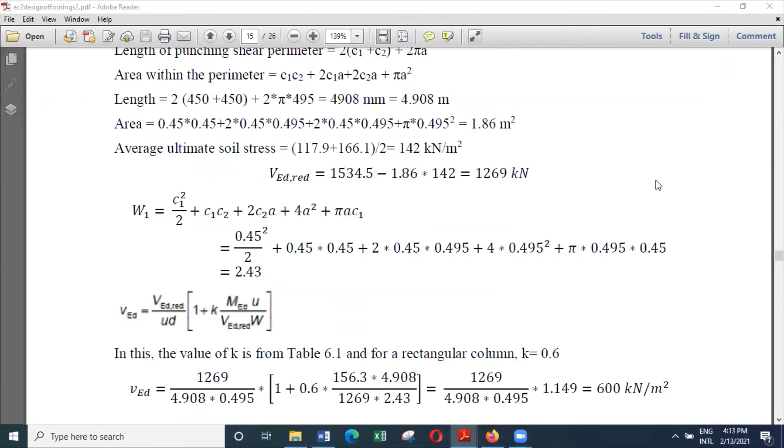So we look at the combined footing. When you have two footings close by, sometimes we can go with combined footing. So again, when two columns are located close to each other, sometimes it's convenient to combine the footings to form a continuous base.

The projections outside the column boundaries are selected so that the resultant load passes through the centroid of the base area when all loads are acting under service conditions. The idea is this is expected to give a uniform pressure under the base. And then we consider the same uniform pressure might remain under the ultimate conditions as well.

So basically we'll have a quick look at one example. Design a combined footing to support two columns located 3 meters apart. So the distance between two columns is 3 meters. The allowable bearing pressure is 200 kilonewtons per meter squared. And concrete strength is 25 megapascal and steel strength is 500 megapascal.

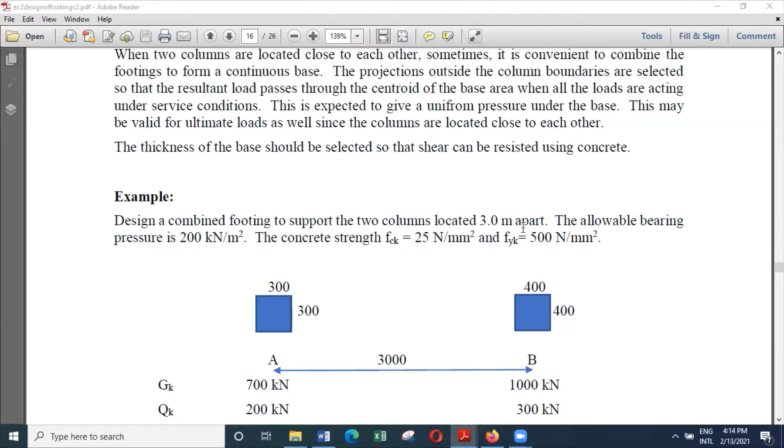And the size of the columns are 300 by 300 and 400 by 400. This column carries a lesser load, 700 and 200. And this carries a permanent of 1000 and variable of 300. So basically we have to select a suitable size for the base.

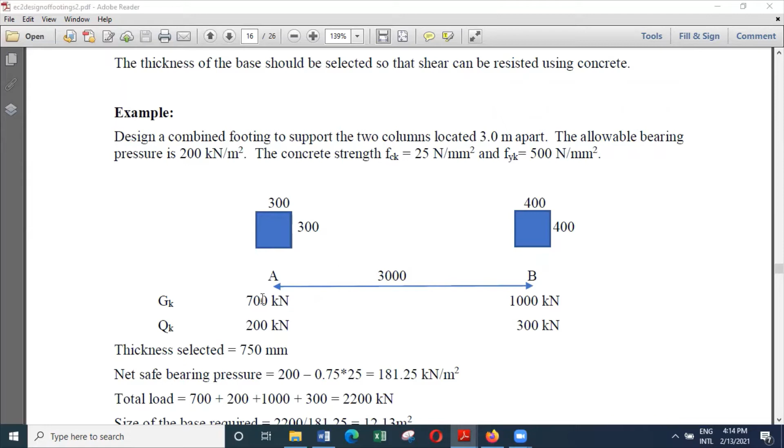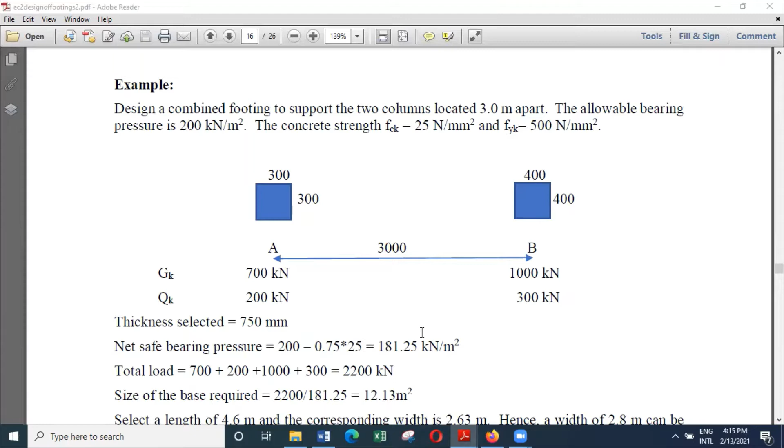So to select the size of the base, we'll simply add all these loads. And in addition to that, we'll also calculate the net bearing pressure. I told you earlier that either we can calculate and add the weight of the base, or we can calculate the net bearing pressure, that is 200 minus the thickness of the base multiplied by the density will give us the net bearing pressure that can be applied, which is 181.25.

So the total load is about 2200. From that, you can see that we need a base of around 12.13 square meters.

And this distance is 3 meters. So we can select a reasonable length for the base. I have selected a base length of 4.6 meters. And for a 4.6 meter length, once you divide 12.13 by 4.6, you will get a width of 2.63. So I'll select a width of 2.8 meters, length of 4.6 meters.

But the question is, what is the overhang that I should be getting here? We know the total length, but we don't know what is the projection from the face of the column. To get the projection from the face of the column, we make an assumption.

That assumption is the centroid of these two loads will act somewhere here. And we'll place the base in such a way the resultant of the soil pressure will also act through the same point. The idea is, when you do this, you will end up with no bending moment, because the resultant force is acting through the resistance. If there's no bending moment, then the pressure distribution under the base should be almost uniform.

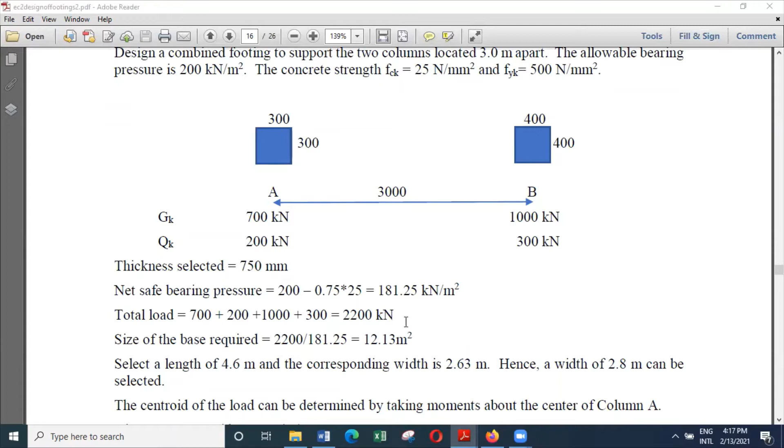So what we do is, first we find what is the distance to the centroid, and then we'll bring the centroid of the base to the same location. So what we do is, to find the distance to the centroid, I can take moments about column A, that is 1300 multiplied by 3 divided by the total load of 2200 kilonewtons. So that is 1300 multiplied by 3 divided by 2200 will tell the location of the centroid. So from this centroid, on either side, we should get 2.3 meters.

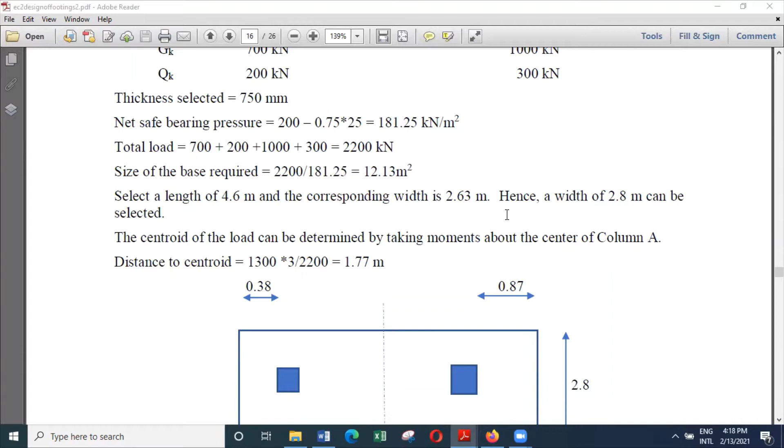2.3 meters on either side. So 2.3 minus 1.77 is 0.53, and the size of the column is 300 by 300 minus 0.15 will give 0.38. And on this side, if it is 1.77 meters from here, it will be 3 minus 1.77 from the other side. That means from this side it is 1.23 meters.

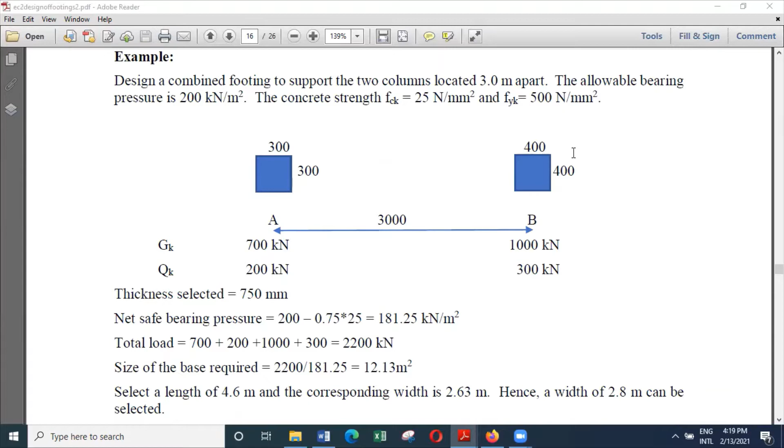We select a length of 4.3 meters, 4.6 meters. So 2.3 minus 1.23 will give us 1.07 minus 0.2, half the size of the column, will give us a projection of 0.87 meters from this side. So we get a projection of 0.87 meters from this side, a projection of only 0.38 meters from this side.

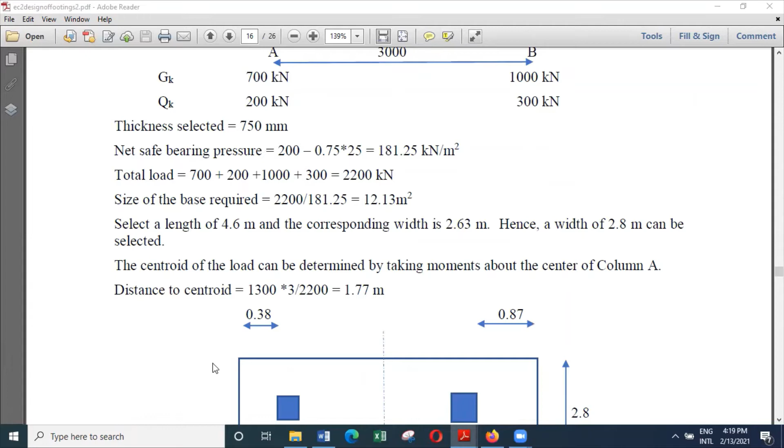Now we know that the resultant force of these will act 1.77 meters away from the center of column A, and the resultant of the soil pressure underneath also acts on the same line. Because of that, there's no moment acting on the base. If the moment is zero, only the axial load is there, and when the axial load is there, we can find the axial stress.

The axial stress will be given by, for design purposes, we have to go with the ultimate. That means 700 multiplied by 1.35, 200 multiplied by 1.5. Here also 1000 multiplied by 1.35, 300 multiplied by 1.5. So you'll end up with a total load, this divided by the area of the footing will give us the maximum pressure acting from below, which is 236 kilonewtons per meter square.

So now the base is balanced. How we balance that is by finding the centroid of the column loads, and then coinciding the centroid of the base with the centroid of the resultant forces. That way we can find the stress, and you know the cover to reinforcement and effective depth.

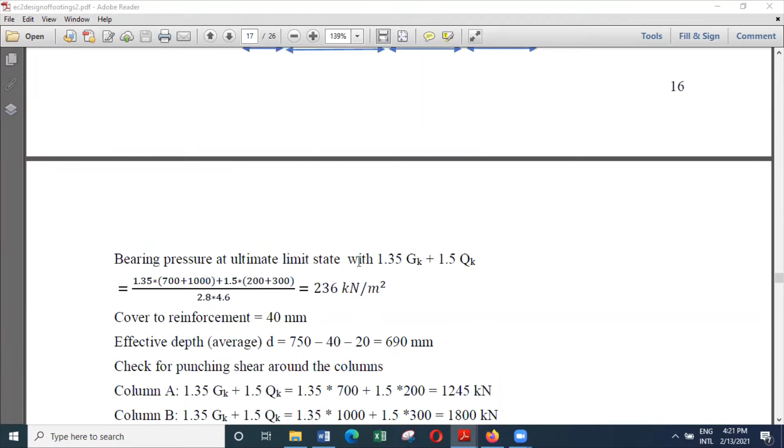I have considered an average value of 690, and we also know the punching shear forces in the individual columns. Then we can first check whether there can be any punching shear failure at the perimeter with the selected depth of 750 millimeters.

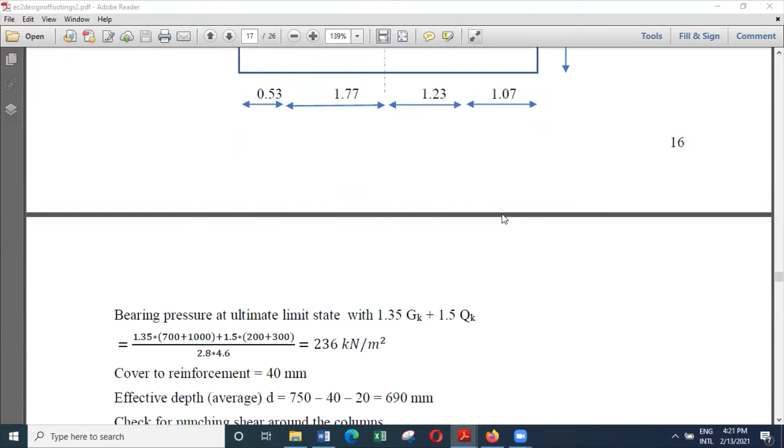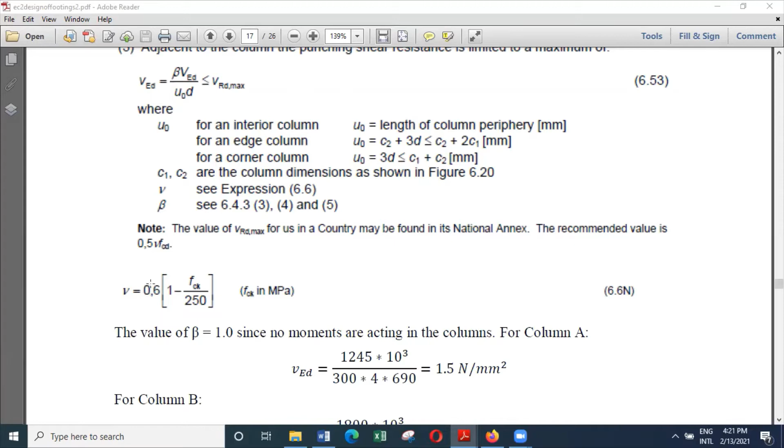For that, we have to calculate the maximum shear strength, which is given by this particular expression, where nu is this, so we can calculate the punching shear resistance. But when calculating that, VEd should be less than VRd,max.

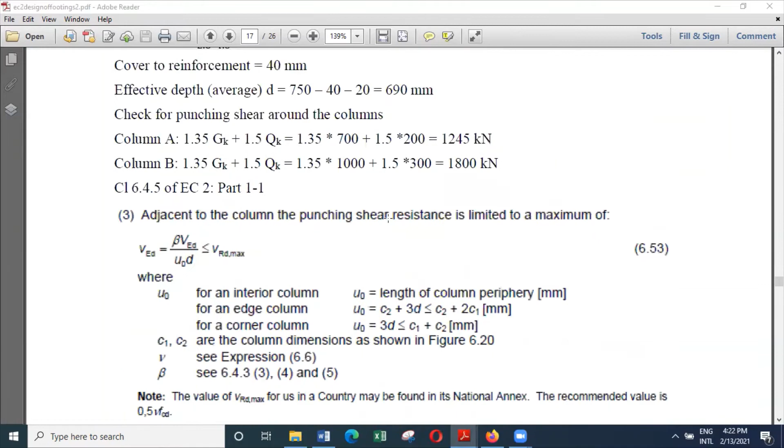So what we can do is we can calculate the value, 1245 kilonewtons divided by 300 into 4 is the perimeter of the column, and effective depth is 690. So we can see VEd is equal to 1.5 newtons per millimeter squared. For column B, 1.63, and VRD max is 4.5.

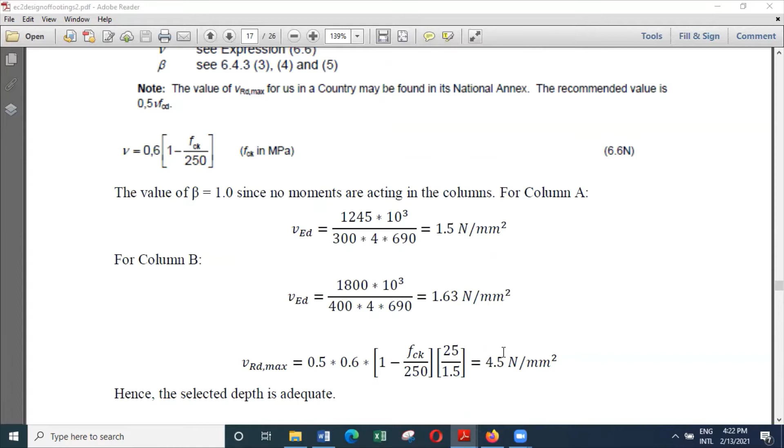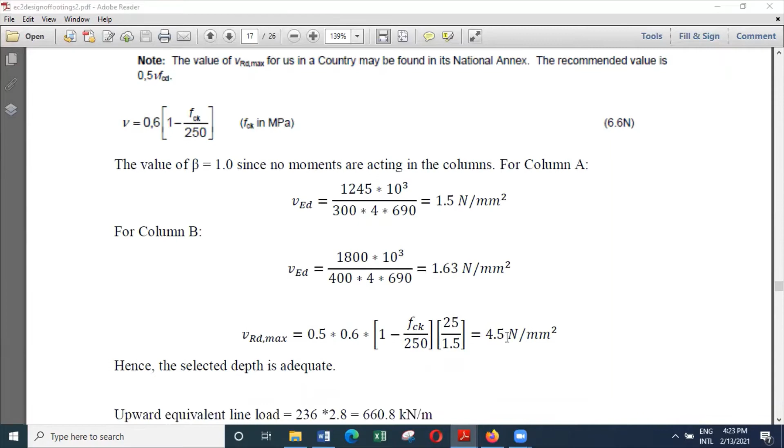Generally we can have an idea: VRD max is about 4.5 to 5 newtons per millimeter squared. Generally the shear strength of concrete is about 0.4 to 0.5 range, it can be more as well, but generally in that range. This indicates that there cannot be any shear failure around the perimeter.

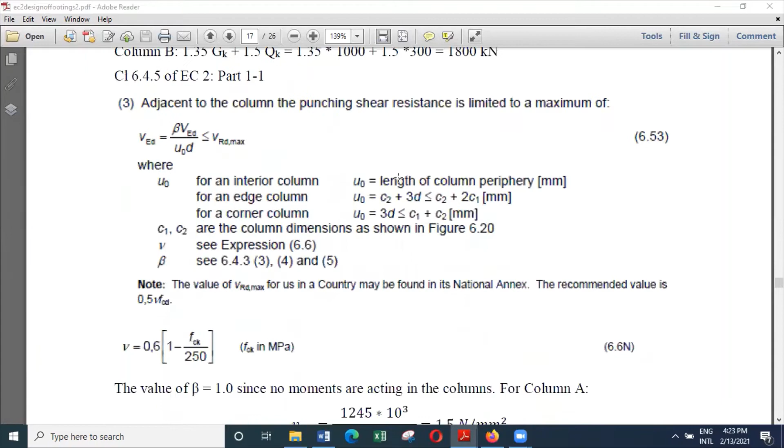Then what we have to do is find the bending moment diagram due to the loads acting on this, because there's a width of 2.8 meters and a pressure of 236. You multiply 236 by 2.8 to find a line load. Equivalent line load is 236 into 2.8, that is 660.8. So the situation is we have a base of 4.6 meters of length and a force of 660.8 acting upwards.

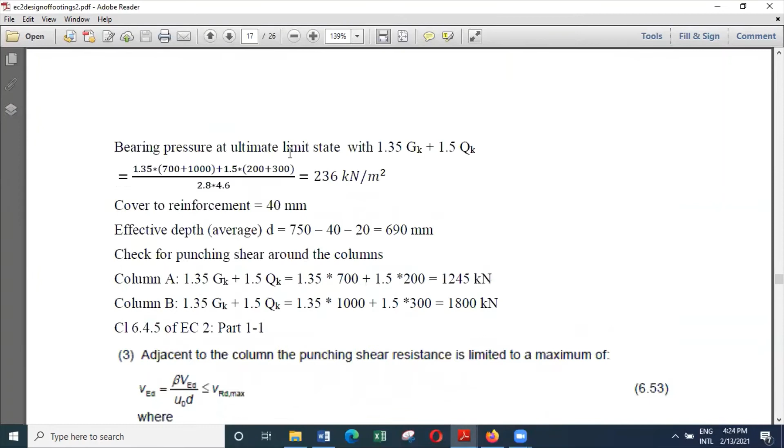So you can find the shear force here. Shear force at the face of the support, the projection is 0.38, so the shear force at the face of the support can be found, and also we can find the shear force at the center of the support. The shear force diagram is drawn with the center of the support: 660.8 multiplied by 0.53 is 350. So this is the shear force at the center of the support.

And at 350, we get a shear force of 1,245 kilonewtons acting downwards. So 350 minus 1,245 will give us 896. Then the shear varies this way, because again 236 is acting upwards, and the distance between these two is 3 meters. So 896 minus 236 into 3 is...

896 minus 236 into 3... sorry, 660.8. 896 minus 660.8 into 3 is minus 1086. So the shear force goes that way.

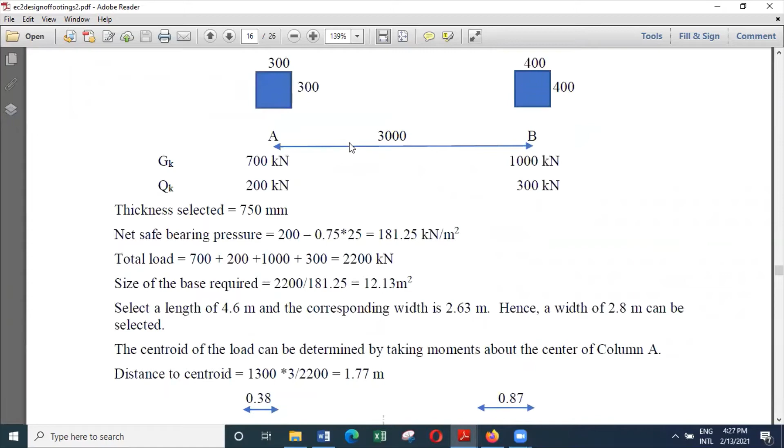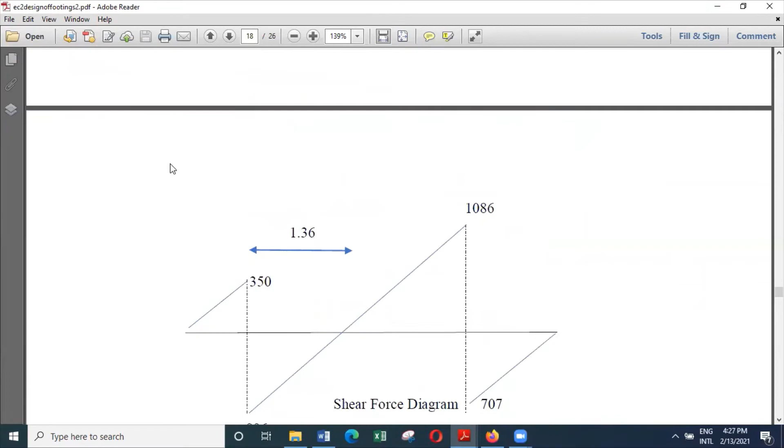So here you get a force of 660.8 acting over a length of 1.36 plus 0.53, which is 1.89, multiplied by 660.8 into 1.89 divided by 2. That is the moment acting upwards,

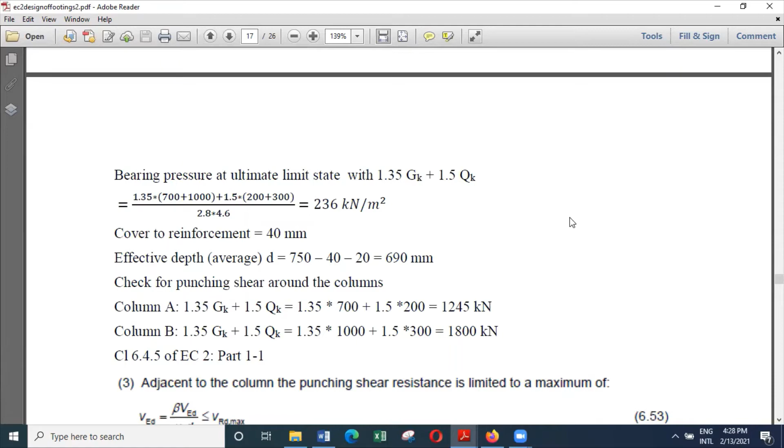minus, you get a load of 1245 multiplied by 1.36, you get a moment of 512. I have got the answer as 644. Let's just have a look at the moment.

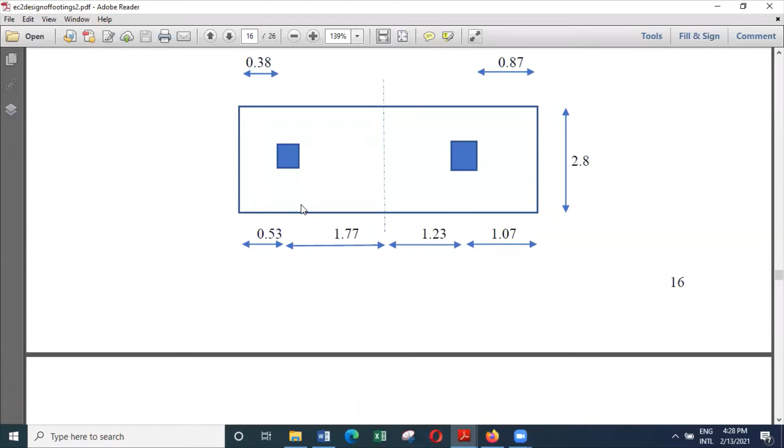The overhang is 0.53 meters, so 660.8 multiplied by 0.53 squared divided by 2 is 92.8. Yeah, that's correct. So the bending moment here will be equal to

660.8 multiplied by 1.89 squared divided by 2, minus 1245 multiplied by 1.36, then minus 513. So this value may be 513, but I have considered it as 644.

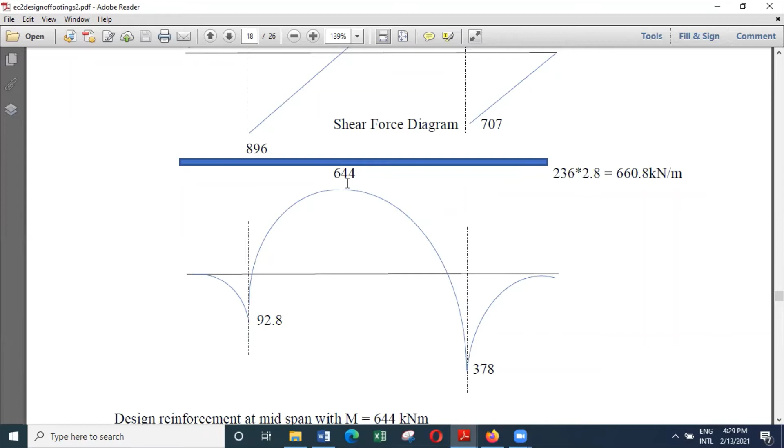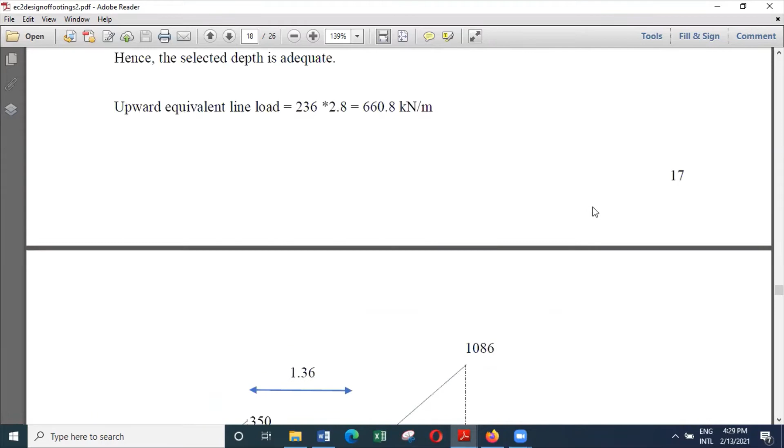Similarly, on this side also you can find the bending moment. The projection is 1.07, so the bending moment here is 660.8 multiplied by 1.07 squared divided by 2.

1.07 square divided by 2... 7 square divided by 2, that is 378. So this is correct. This may be slightly different, but it doesn't matter.

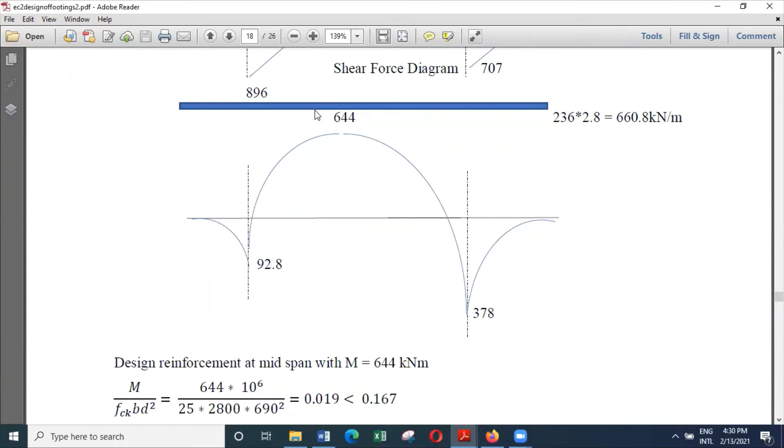So the bending moment, shear forces - you can decide the reinforcement on the basis of this. And when you decide the reinforcement on the basis of this moment, you can see 0.95D governs, can find the reinforcement, and then find the minimum reinforcement, and you can see the minimum reinforcement is governed. Because the minimum reinforcement is governing, when you look at the number of bars, you need 13 bars.

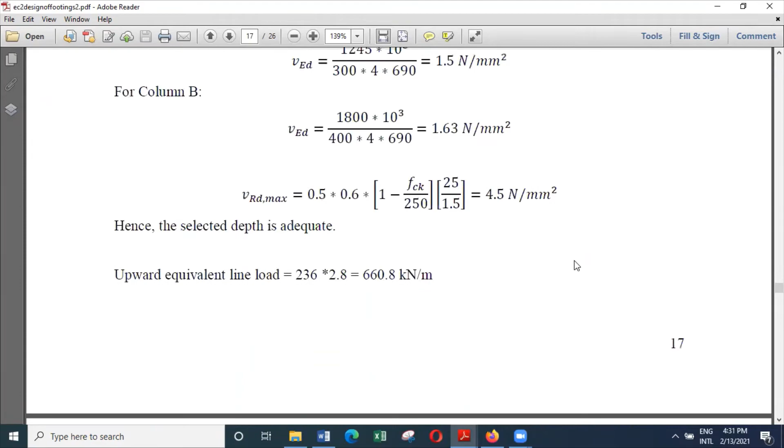So in this combined footing, because the minimum reinforcement is governing, we need 13 number of 16 diameter bars at the top, and also 13 number of 16 diameter bars at the bottom, in this direction. Similarly, there's a projection here, and you can find the bending moment in the shorter span direction also, and then provide the reinforcement in the shorter span direction as well.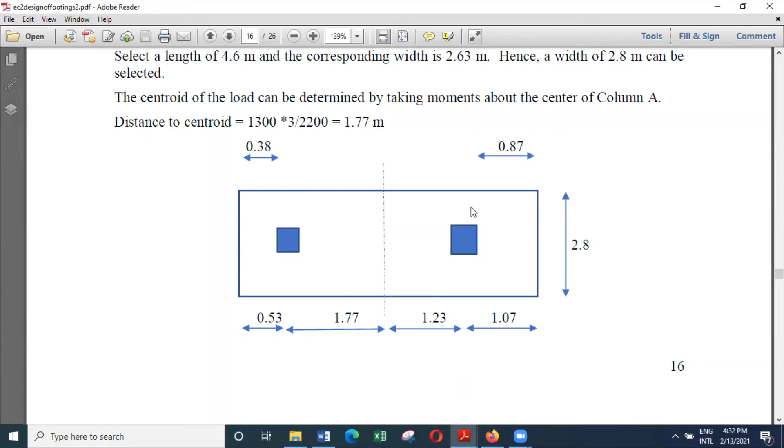In addition to that, you can check for punching shear failure around the most heavily loaded column. And if the punching shear failure does not occur around the most heavily loaded column, then you will say generally the foundation is okay.

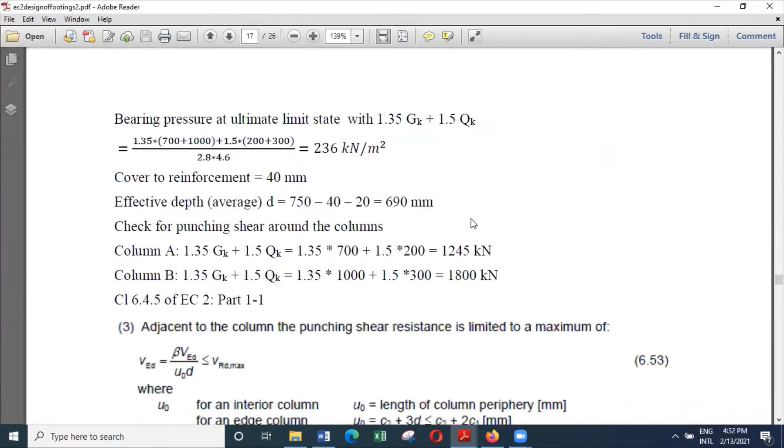So you can see the main reinforcement can be found. In addition to that, you have to check the base for shear failure. Check the base for shear failure.

And you can see when you look at the shear force diagram, there's a maximum value of 1086. So the maximum direct shear might occur somewhere here, and that is D away from the face of the column. So you have to find the shear force D away from the face of the column.

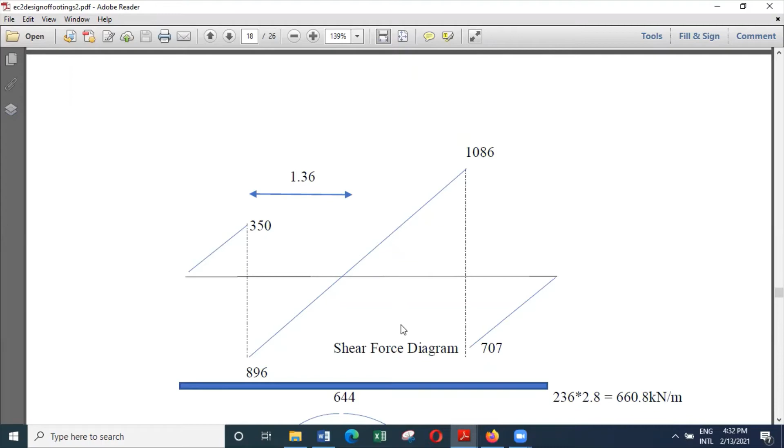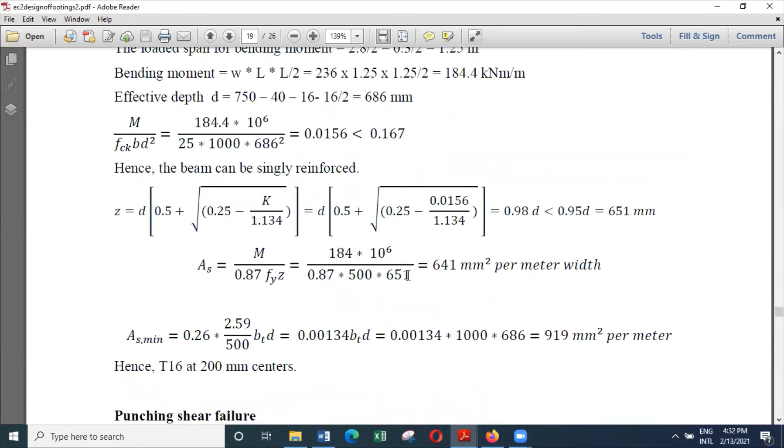And then you have to find the shear failure at the face, shear failure D away from the face of the column, and then check that as well.

So here you can see check for direct shear failure. Direct shear failure is 1086 minus 286 multiplied with 2.8, and 0.69 is the effective depth, plus 0.2 is the size of the column. You can find the direct shear force, and from that you can work out what is the direct shear stress, and you can see it's less than the V minimum value.

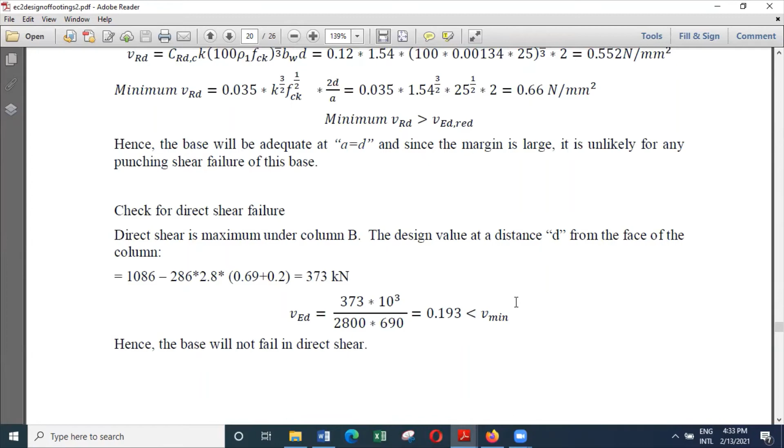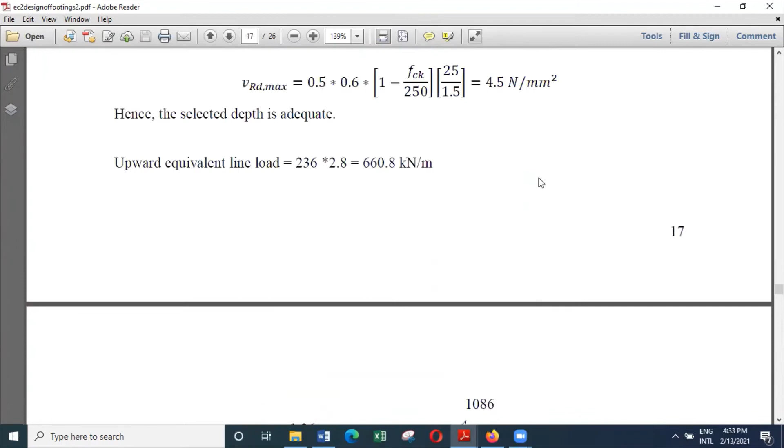And similarly, you can check at a distance D away from the face of the support. Here also I have checked D away from the face of the support. The reason is, here you can see when you look at the size of the column, it's only 2.8 here, and when you consider the projection from here, it is only 1.2 meters. That means the 2D perimeter is outside the base.

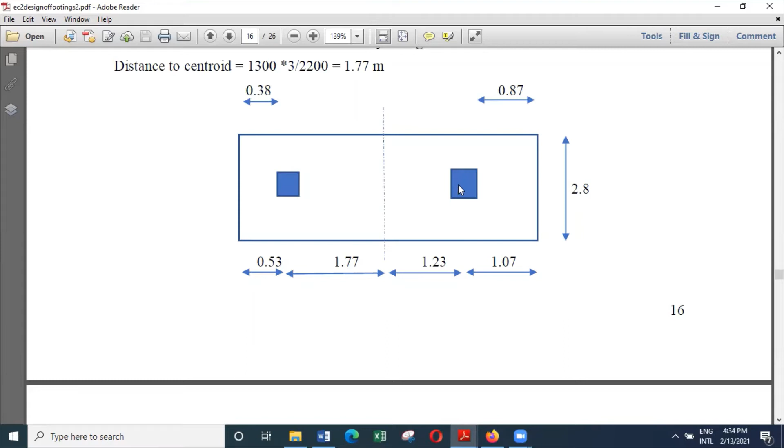So instead of checking at 2D, you can check at 1D and see whether the punching shear failure can occur. But at 1D, you get the enhancement as we discussed earlier. So basically, when it comes to the combined footing, the important thing is to get the dimensions right, so that you will find that the resultant force due to the two columns will coincide with the center of the base.

So because we have repetition of calculations, I did not spend much time looking at the reinforcement calculation and so on. But the only thing I wanted to highlight is the bending moment diagram. I think this value may be 500 something, not 644. We have to just do a calculation and see, and based on that, you can work out the reinforcement.

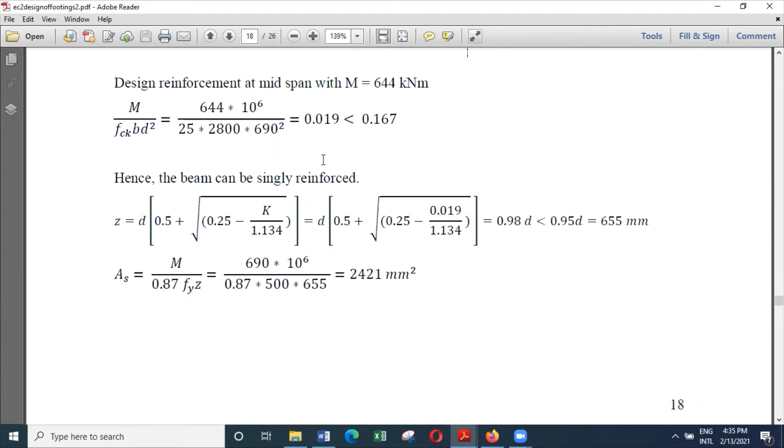And when you work out the reinforcement, you can see the minimum reinforcement is now governing, because the reinforcement requirement here is 2421, whereas the minimum reinforcement requirement is 2588.

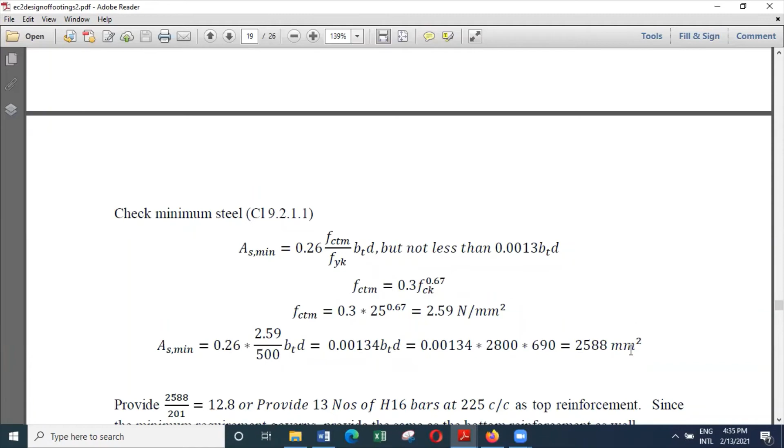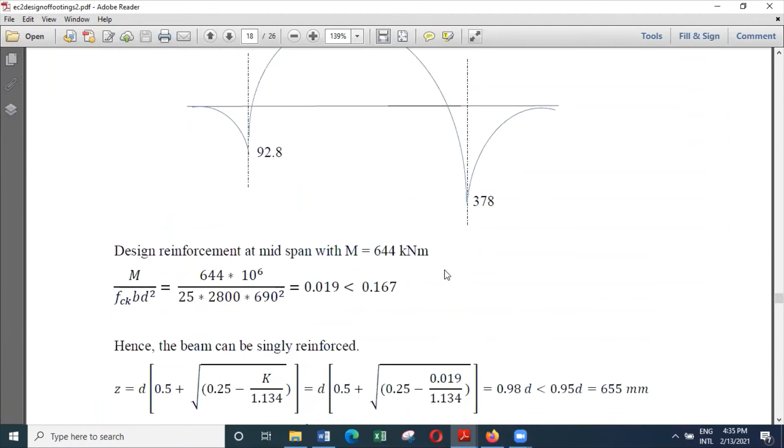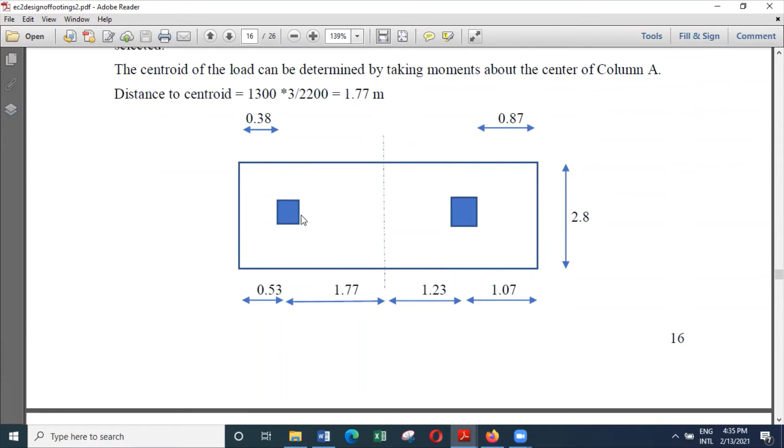So then in the transverse direction also you can check the bending moment, and I have checked the bending moment at the face of the smaller column. On the other hand, because we are having two columns, if you want, you can check the bending moment at the center as well. I have considered the bending moment at the face of the smaller column.

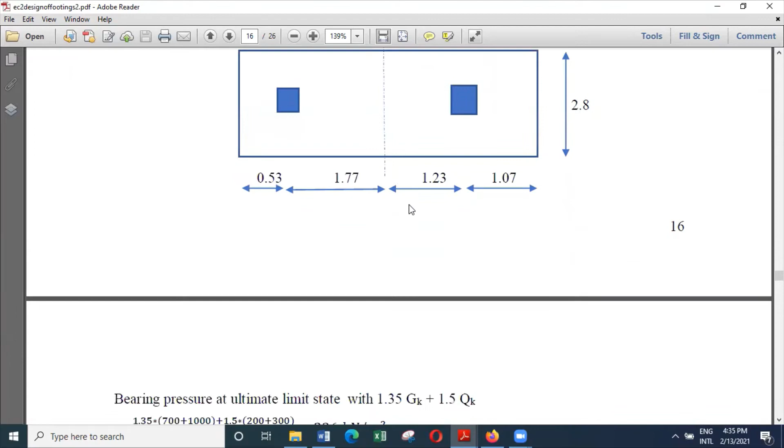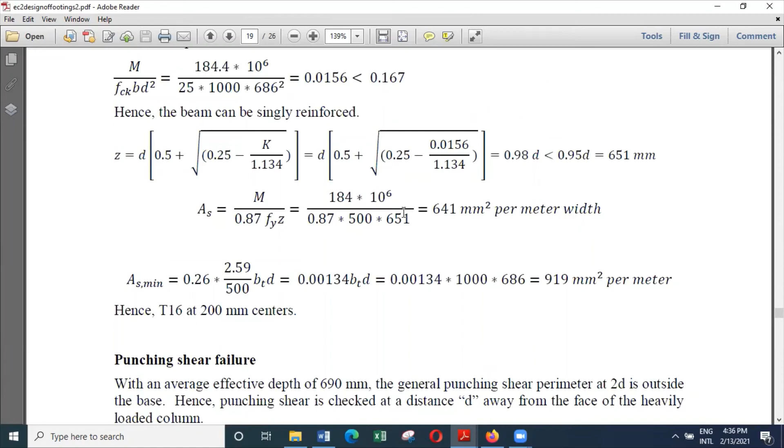You can check the bending moment at the center of the column as well, because we have two columns separated. And then this transverse bending, then you can check for punching shear.

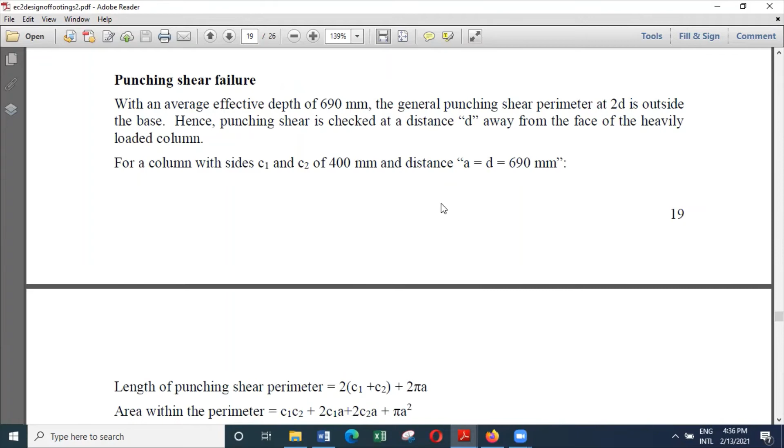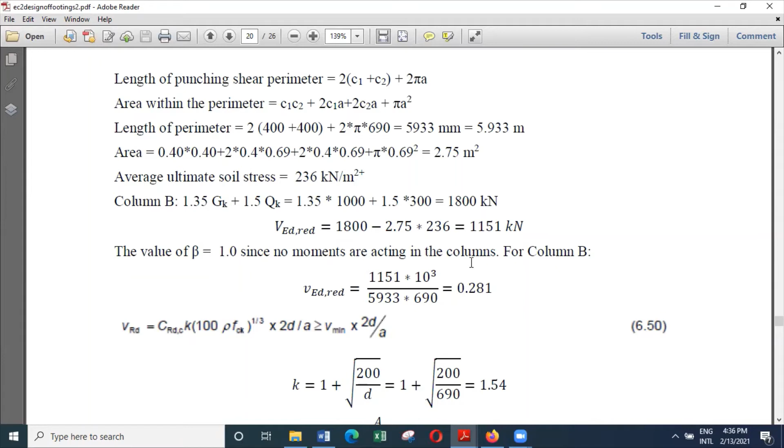And because the punching shear perimeter is almost outside the base, I have checked at D instead of 2D. And when I check at D and consider the V reduced value, the shear is 0.281. So even without enhancement, you can see this value is less than the minimum.

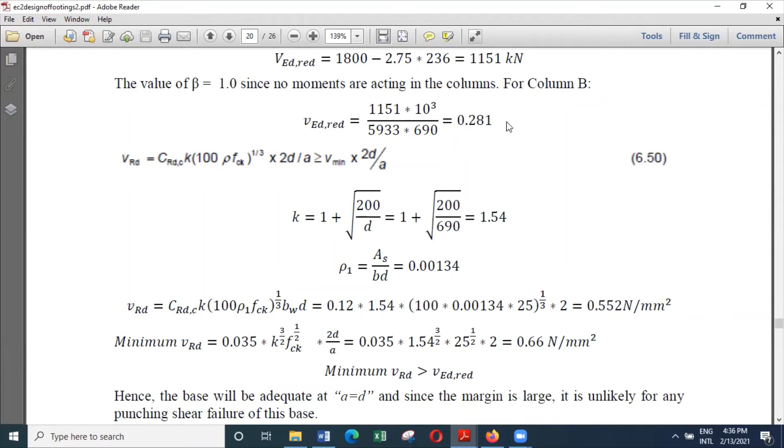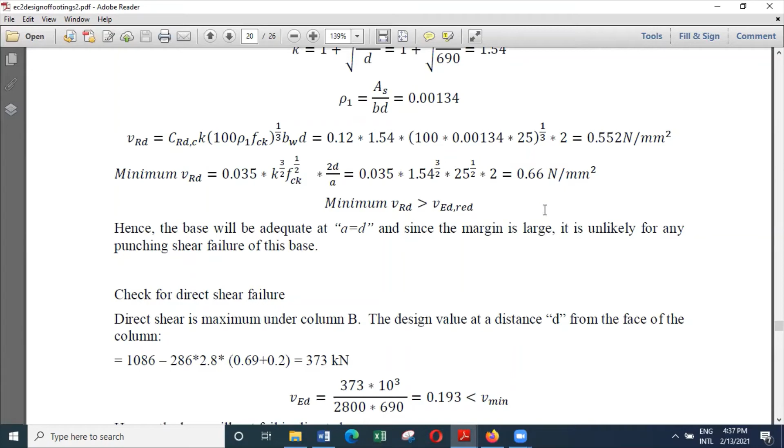So the same calculation repeated, and you can see the shear carrying capacity is 0.66, whereas the punching shear stress is 0.281. So there's no chance for punching shear failure. So basically the thickness selected, 750, looks fairly high, and there's a chance that you might be able to reduce the thickness of the base, because direct shear is also, you can see, very low value.

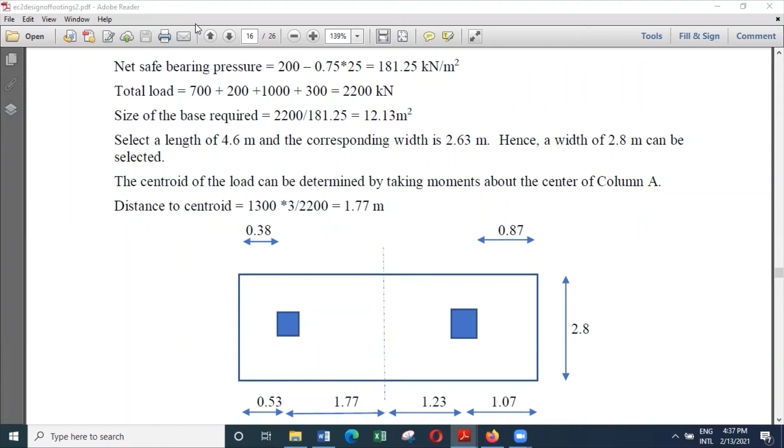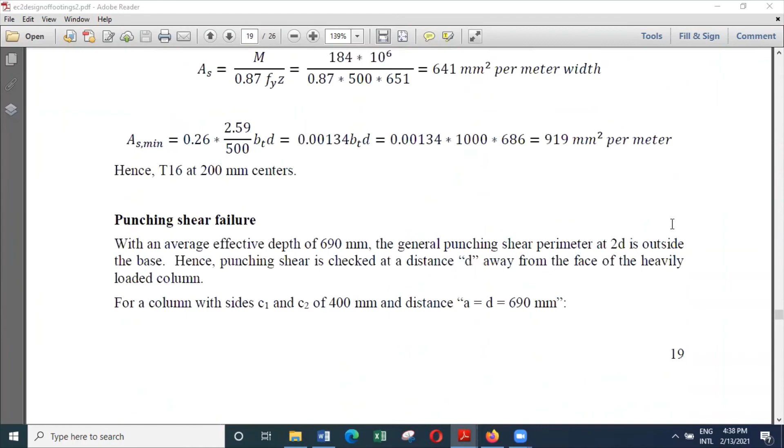Now move to the next, strap footings. So what do you mean by a strap footing?

In combined footing, what happens is we continue the base from one base to the other and we combine that. And we also try to make sure the center of the loads acting in the two columns will coincide with the center of the base.

But sometimes what happens is, we cannot fulfill that condition. In which case, we'll end up with a variable stress distribution under the base. But in such situations, there's another solution, provided the soil is fairly strong and the inner column is carrying a higher load than the outer column.

So generally, inner columns will carry higher load than outer column because the inner column is loaded from all directions, whereas the outer column is loaded only from one side. Because of that reason, generally the outer column will carry a lower load than the inner column. So that's one condition that you have to fulfill.

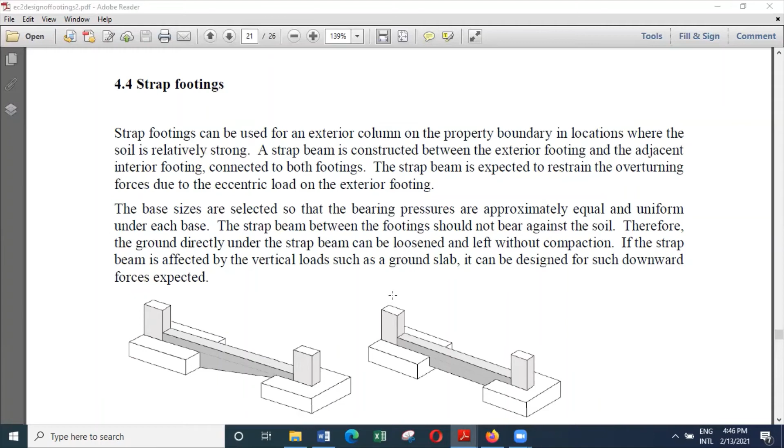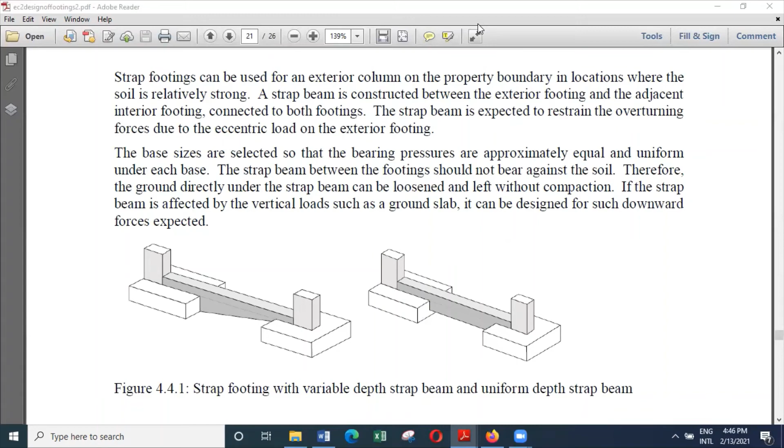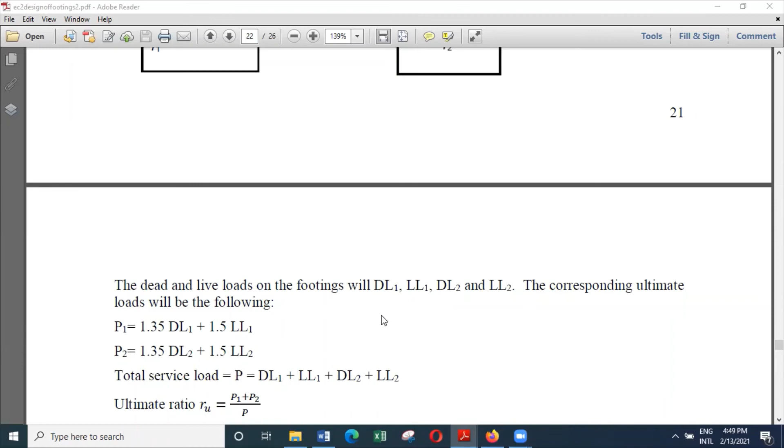P1 will be 1.35 DL plus 1.5 live load. P2 will be 1.35 dead load plus 1.5 live load. And the total service load will be the addition of all four loads.

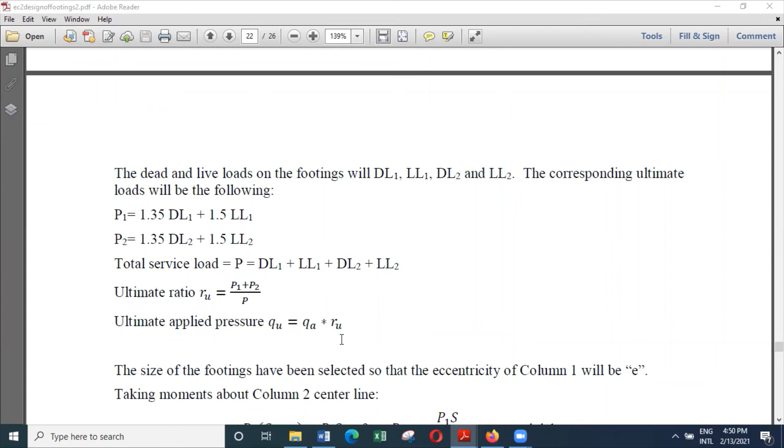Then you can see the ultimate ratio RU is the addition of these two divided by the total service load P. So we know the ratio between the ultimate soil pressure and the service soil pressure, and the ultimate pressure applied will be the allowable pressure multiplied by RU. So basically we have to select the base sizes so that we'll remain closer to the allowable pressure.

The next important thing is how to select the size of the footings. The size of the footings is selected so that the eccentricity of column 1 will be E. If the eccentricity of column 1 is E, and you take moments about this point, then you can say P1 multiplied by S minus R1 multiplied by S minus E is equal to 0.

Ignoring the self weight of the strap beam, you can see R1 times S minus E minus P1 times S is equal to 0. From that you can work out the value of R1, which is P1S divided by S minus E.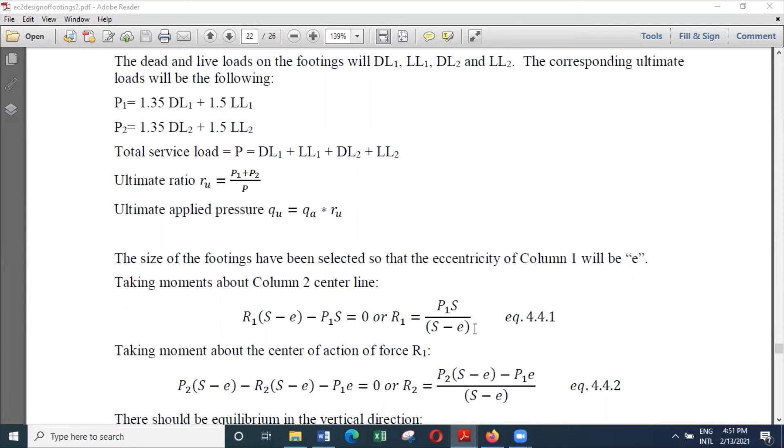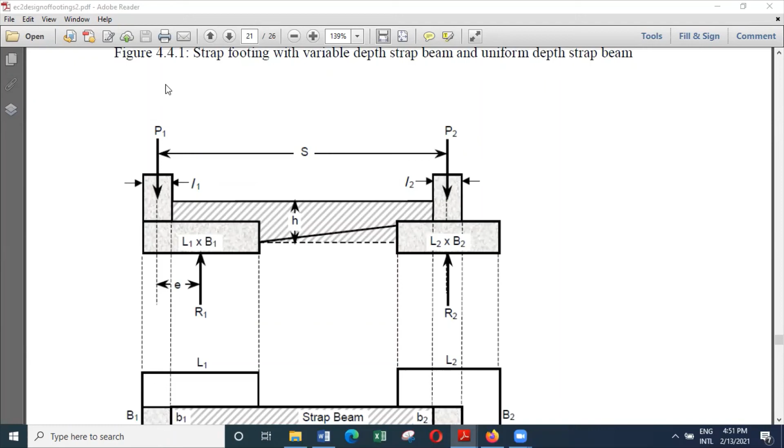So when you look at R1 and R2, you can see R1 will be bigger than P1, and if you look at R2, R2 will be smaller than P2. Then if you take the equilibrium of the whole system, R1 plus R2 is equal to P1 plus P2.

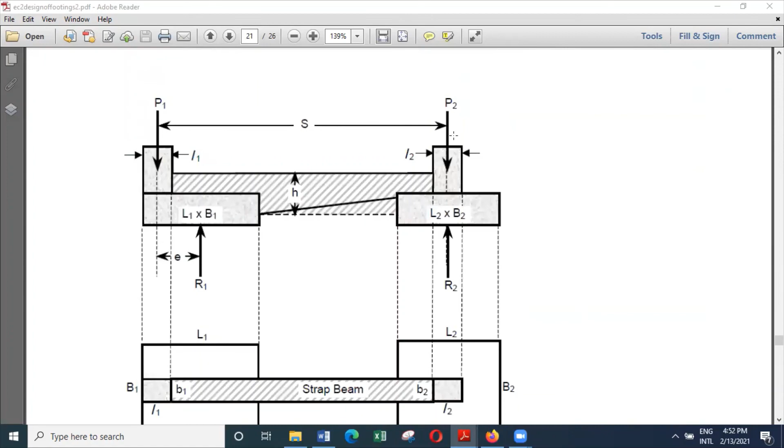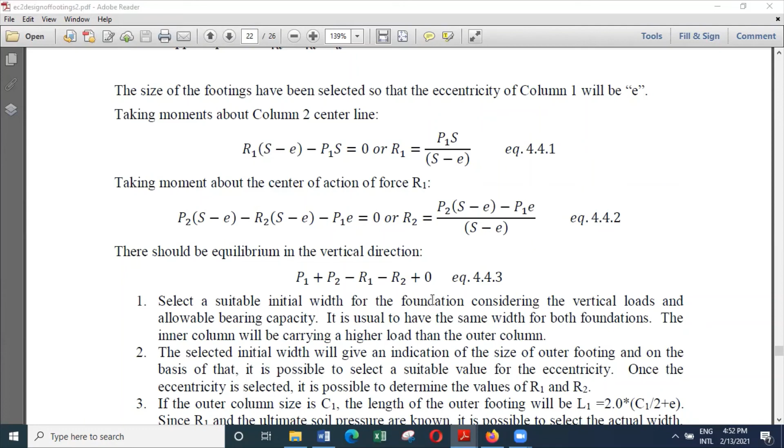So what we do is first we select a suitable value for E. To select the suitable value for E, first we have to find the sizes of the base. So what we do is first select the approximate size for the base, and the size for the base will depend on the value of P1, that is the dead load and live load, divided by the allowable bearing capacity of the soil.

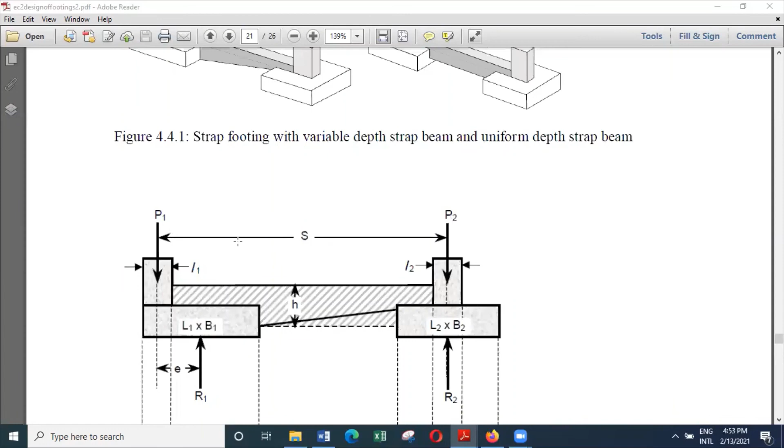Then on the basis of that, we can work out a value for the approximate size for the bases. Once we know the approximate size for the bases, we can work out a reasonable value for eccentricity.

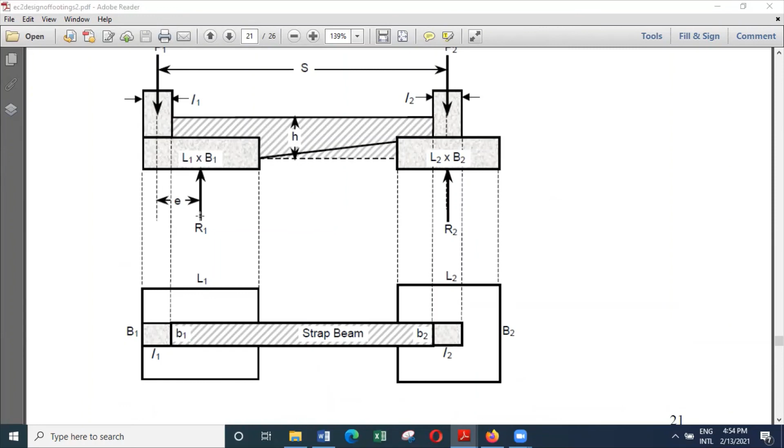For example, let's say we have got 2 meter by 2 meter for this base. If the approximate size of this base is about 2 meter by 2 meter, then we know eccentricity is 0.8 meters. This will be 1 meter. Size of the column is 400, which means eccentricity will be 0.8 meters. So once you determine the approximate size of the bases, you can work out a reasonable value for E.

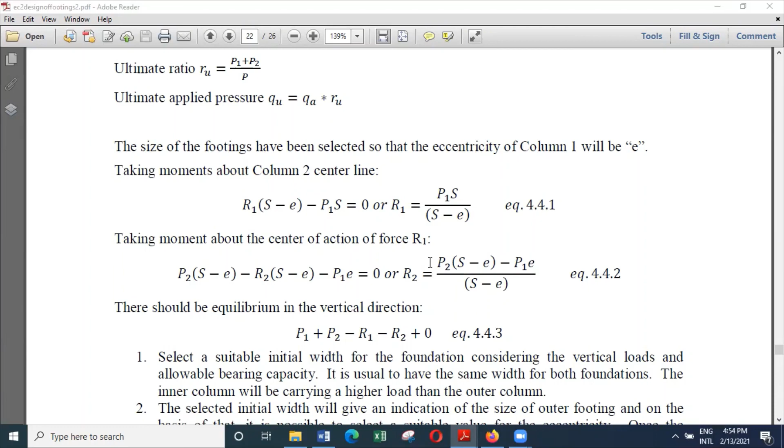Once you know a reasonable value for E, we can work out R1 and R2. So the procedure is: select a suitable initial width for the foundation considering the vertical loads and the allowable bearing capacity. It is usual to have the same width for both foundations. The inner column will be carrying a higher load than the outer column.

Then the selected initial width will give an indication of the size of the outer footing on the base, and on the basis of that, it's possible to select a value for eccentricity. Once the eccentricity is selected, it is possible to determine R1 and R2. So once you know R1 and R2, now you can work out the length of the outer footing and the pressure to be taken by the soil.

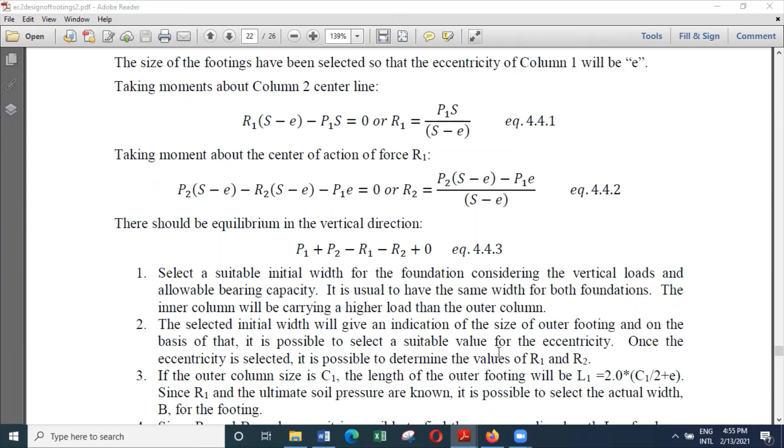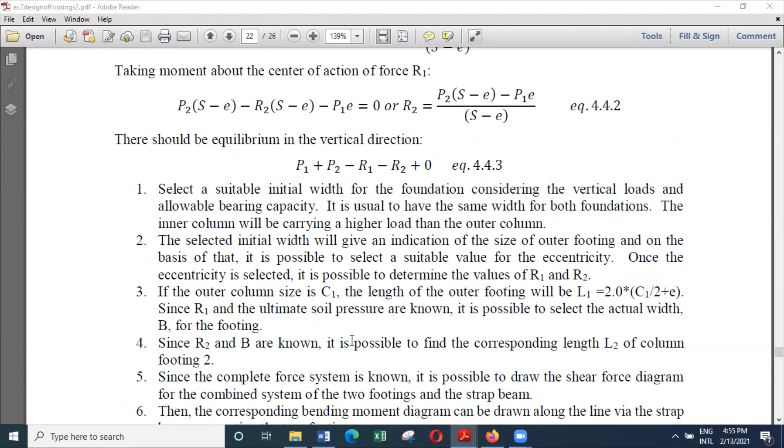Once you know the sizes of the system, then you have to draw a bending moment diagram and a shear force diagram for the system. And when you know the bending moment and shear force diagram for the system, it's possible to determine the reinforcement that you need in the strap beam.

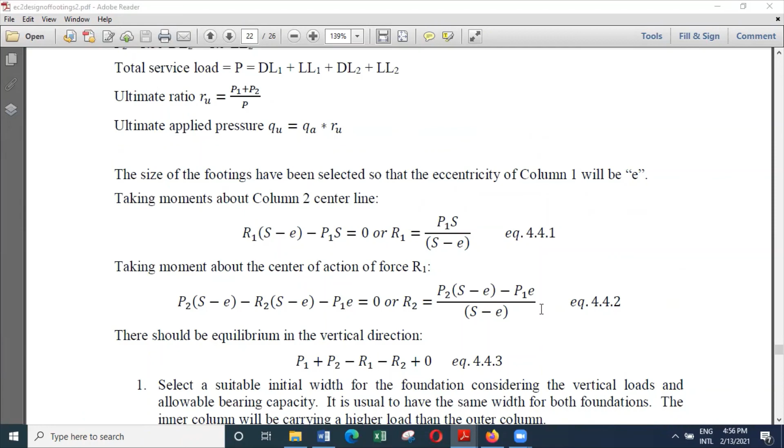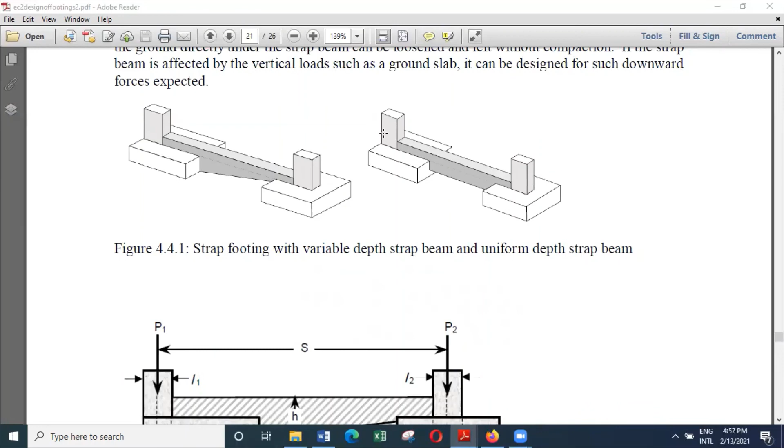So these strap footings are quite useful when you have an eccentrically loaded footing, especially on the boundary wall, because you are not supposed to have the foundation on the nearby land. So we have to go for this type of situation. And when you have reasonable soil, you can always effectively use strap footings to ensure that the rotation at this outer footing is minimized.